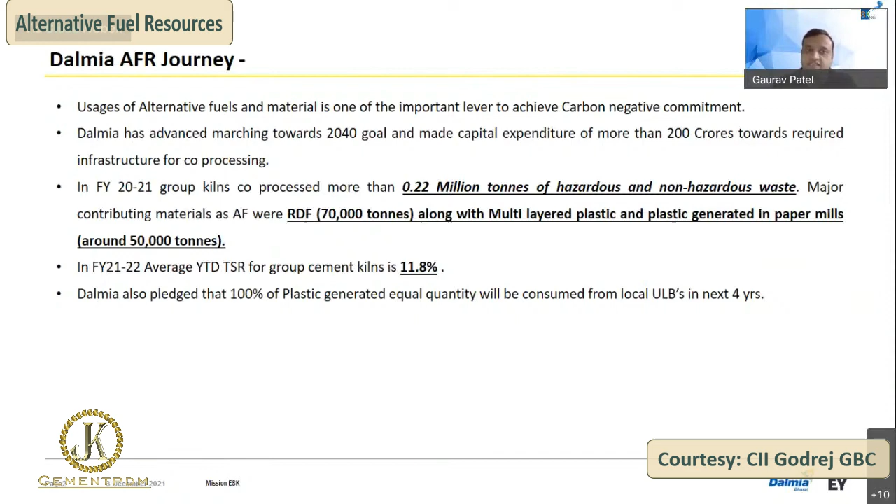Moving ahead, when our journey started in 2019, our TSR was 3.9%. Then we moved on. By end of FY20, by December 20, we had installed imported shredders. Earlier, we had only Indian shredders and feeders, which I can say was a very crude manner of utilizing the AFRs.

We increased the TSR from 3.9 and up to October it is 11.8% TSR. And by March 2022, our TSR target for our entire group would be 20% TSR. We are utilizing AFR in 11 kilns, and kiln-wise, most of the kilns are at 10% plus TSR.

Wherever there is less than 10% TSR, we are facing a challenge, as the earlier presenter also informed, that the main challenge for increasing green fuels is the chlorine content. So in two of our kilns, we have been hit by the chlorine content. Also, the product portfolio there does not allow us to increase the chloride for that particular plant. So this is the reason.

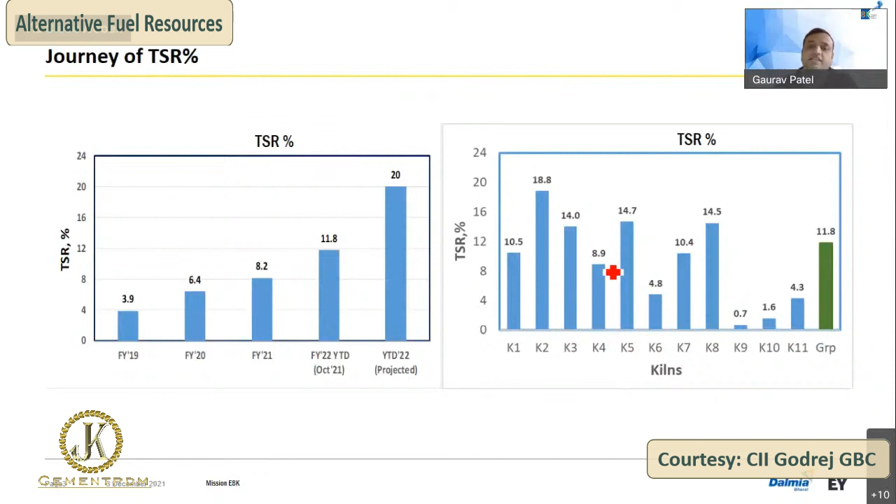So for that, we have made an investment in a chlorine bypass system, which will be commissioned by December and January 22 in two of our locations. From there, we'll be achieving 35% TSR for those two kilns and reaching our target of 20% TSR.

Among the various technologies available, for size reduction there is shredding. For separation, we also have to do metal separation, or else it will damage the refractories inside our calciners. Impregnation is always required to co-process the hazardous waste, so mixing of biomass and sludge material is important.

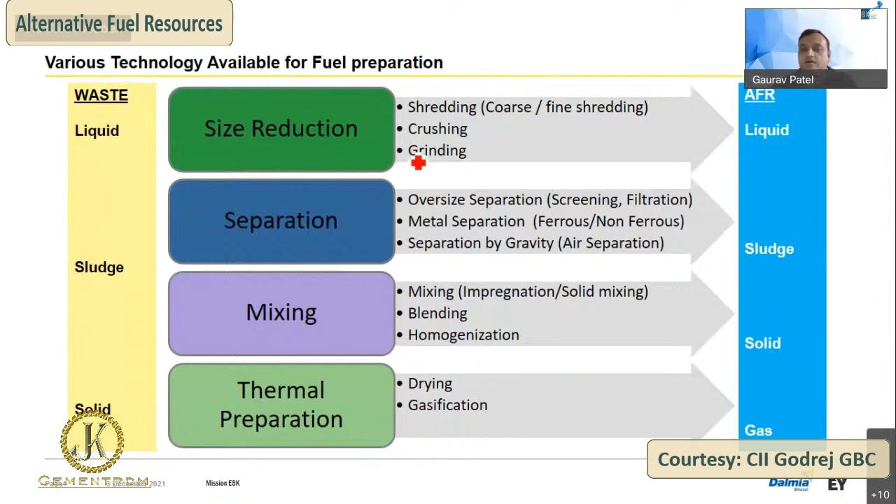And there are other methods like thermal preparation, where drying and gasification of AFRs are also done. This way we'll be getting useful quality and quantity of green fuels or AFRs for co-processing in our kilns.

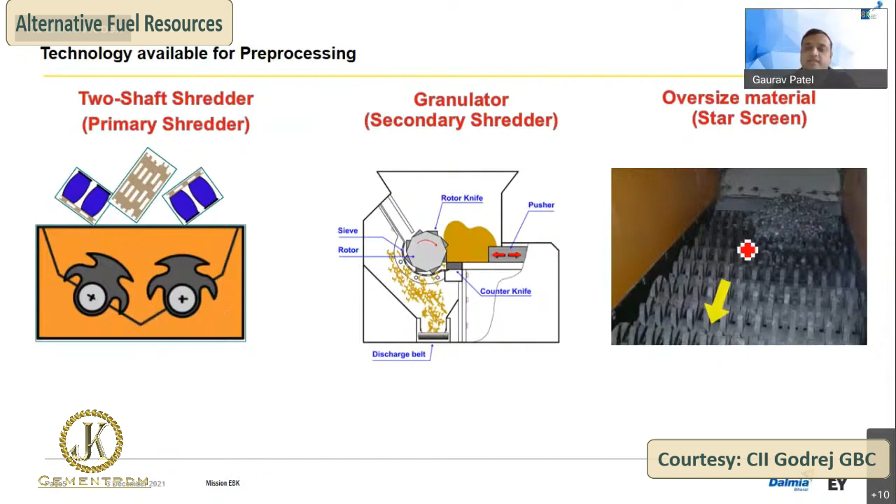We have ATS extractors installed at all our locations, and we have fluctuations of only 0.5 to 0.6 tons per hour with respect to the set point. We have installed ATS double flap systems with 5 seconds operation time. But ATS double flaps, I can say, are suitable for reaching 15 to 20% TSR.

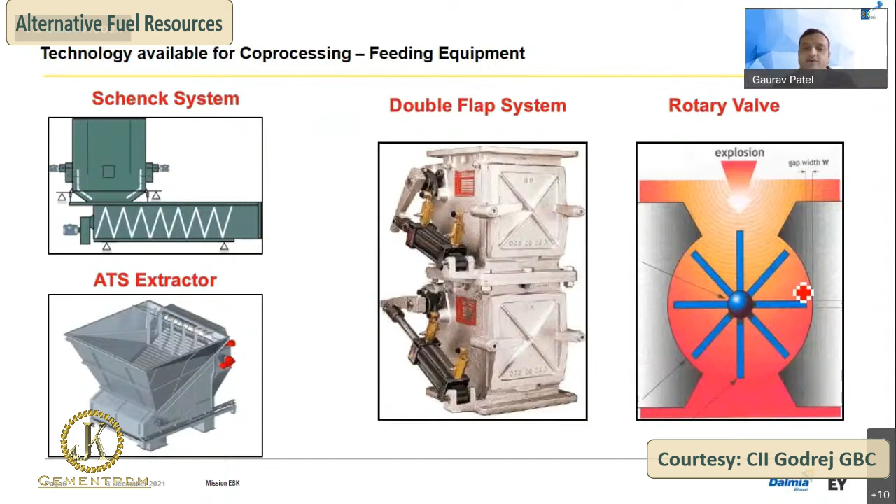Beyond that, we should go for rotary air locks to avoid batch feeding of the material going into the calciner. Once we increase the TSR, tonnages will increase, and these flaps will then work as a batch operation and feed the material in a batch process.

So this is the facility installed in DCBL, with the imported shredders, then the magnetic separator to avoid damage to refractories in the calciner at the feeding locations, then the star screen. The material is shifted to the ATS extractor, then double flaps, and fed to the calciner.

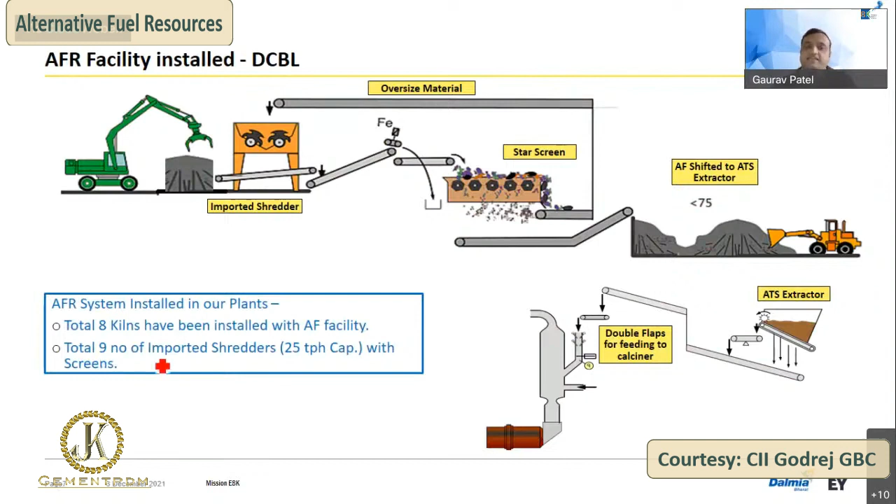So in total, 8 kilns have been installed with AF facilities, and a total of 9 imported shredders of 25 tons per hour capacity with screens have been installed in our DCBL.

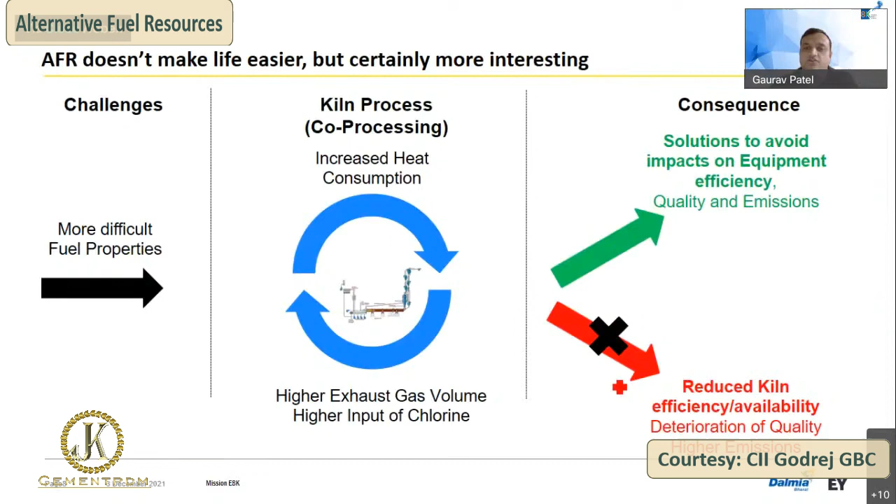Further, with this system, like we say, the increase of AFRs will increase our heat consumption and will increase chlorine, thereby increasing the pressure drop, which will reduce the clinker production. So consequences are there and we have to find the solutions to avoid the impacts. And we also have to find the solutions so that we don't reduce the kiln efficiency or availability.

So for that, our future plan is to aim to become carbon negative by 2040, with our TSR target of 20%. We are planning to install an additional shredder, mostly a secondary shredder, to reduce the size further from 75 to less than 40, so that in the available calciner residence time we can have higher green fuel feeding. Additional feeding equipment, because the ATS extractor capacity is 25 tons per hour, we need to increase it further in order to cater to the increase of heat consumption and the additional volume because of moisture.

We have to do a preheater fan upgradation, and calciner modifications are also planned. And in order to cater to chlorine management, we have been installing chloride bypass systems. So all these minimum things are required in order to achieve the group target, increase the TSR percentages, or increase the feeding of alternative fuels in our kiln.

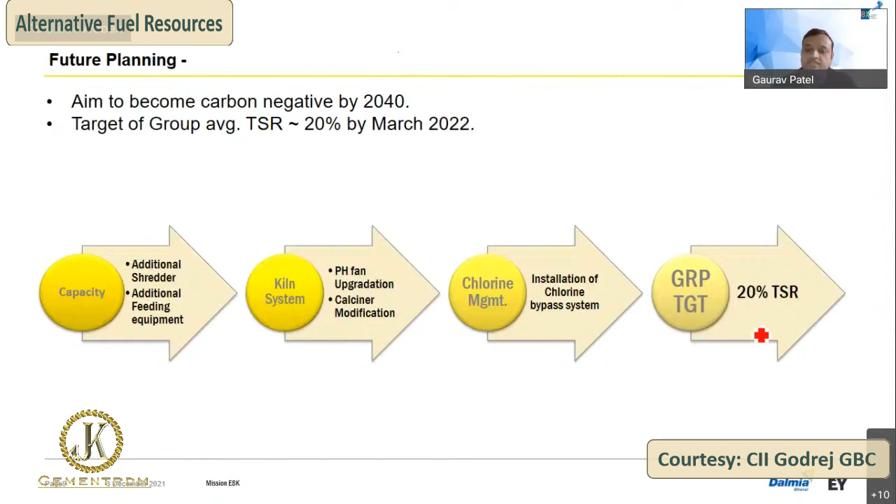Pandey sir has already informed in the starting speech that quality of heat is also important. In our business, our main business is to manufacture clinker, and side by side we also have to feed AFRs. But there should be some criteria where we accept the materials, because lower quality of heat will have a negative impact and there won't be any savings, for which we are planning to use the green fuels. So we have a waste acceptance criteria for all the materials, mostly moisture, ash, flash points. This way we have to manage our AFR business.

Challenges are high moisture and ash. So we are in talks for installation of RDF dryers for reduction of moisture, and exploring a system for separating the ash due to non-availability of good quality limestone. And once we go higher on TSR, our LSF requirement will also increase. So this is where we have to find a solution for extracting the ash. Chlorine content, there's only one solution, which is to install a chlorine management system, like a chloride bypass system.

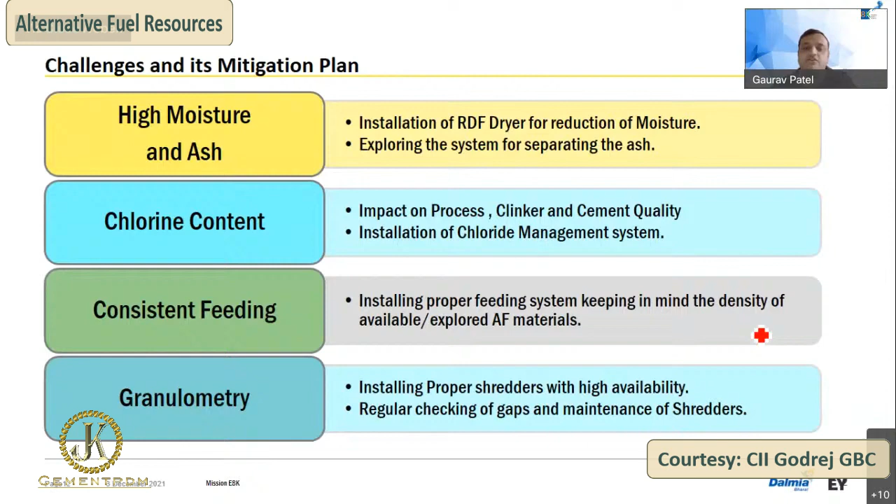Another is consistent feeding. Even if we maintain moisture and ash within our criteria, if consistent feeding is not there, that will also have a negative impact on our system. And granulometry is the size, so proper maintenance of shredders and proper gap checking are also important in order to achieve our target of higher TSR.

Next, moisture: since most RDF comes from biomine sites, there is open transportation of AF, and there is a lack of storage sheds at site and at the cement plant. The method of waste generation and supply depends from supplier to supplier. This results in flame cooling and higher specific thermal energy consumption because of higher moisture content, 40-45% also. And indirectly we have to handle more gas volume with the same preheater fan while maintaining the clinker TPD. So our mitigation plan is covered storage for AF inbound as well as outbound material; whatever shed we had also has to be covered.

Modifications we've already planned: replacement of preheater fans, drying of AF with the help of waste gases, and negotiation for maximum water content or penalties. Like if the moisture content is increasing, we have to have penalties from the supplier to pay us more in order to cater to the higher moisture content.

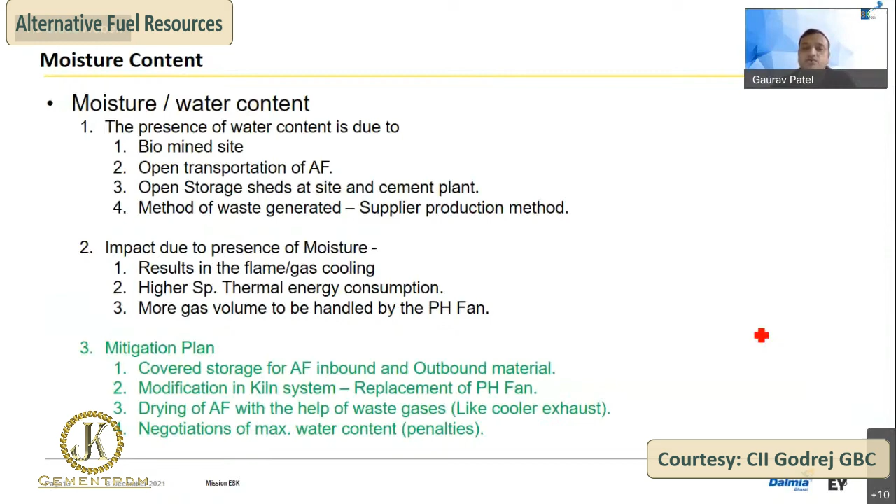Ash is also similar; the majority comes from biomine sites, and dumping and loading techniques increase the ash percentage. This will also have an impact on energy consumption. And the major impact is we have to purchase high grade limestone if that particular quality of limestone is not available with us. And the ultimate result, if we don't maintain the quality, is production of off-spec clinker, which is not our aim. So the mitigation plan is proper pre-processing at source by installing trommels, wind shifters and ballistic separators. The main thing is raw mix optimization to cater to ash and maintain good quality clinker.

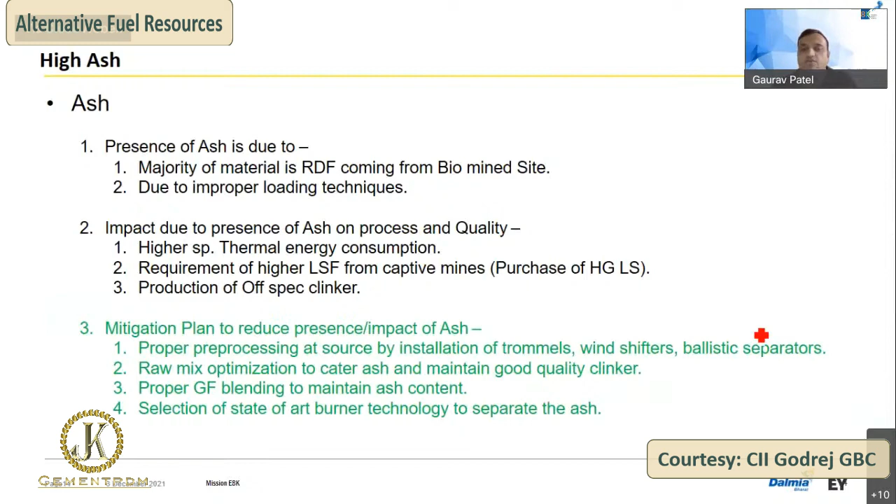Proper green fuel blending: if we have a variety of green fuel AFRs available on our side, we should mix properly to have at least 1 or 2 days of feeding heap available, so that there won't be fluctuation in ash, moisture, and CV, in order to maintain process stability. And selection of state-of-the-art burner technology to separate the ash, so that only the flame or only the heat goes into the system and ash is separated through that burner.

Chloride: yes, we are maintaining a chloride limit. The global standard is 300 grams, but we are slightly higher, around 400-500 grams chloride per ton of clinker. Chloride has the disadvantage of blocking our cyclones' bottom stage. So to avoid the chloride, there are three systems available. One is the proven technology, gas bypass, around 15 to 20 crores of investment, and we have been planning to install it in 2 of our locations.

Another is hot meal extraction, which gives an additional potential of about 200 grams increase of chloride, extracting material around 1 to 2 tons per hour from the bottom stage cyclone hot meal. So this way we can increase chlorine potential by 200 grams. Another is kiln dust extraction: in the direct mode of operation, whenever the raw mill is off, we extract the dust from the baghouse and don't mix it into the homogenization silo. This also gives around 100 grams of potential increase.

The last is chlorine concentration to be agreed with the waste generator, with a cost tag on chlorine concentration. Like moisture, we should also have it on chlorine: higher chlorine, higher the tipping fees, in order to have the ROI working for gas bypass or any chlorine management system installation. For this, every 2 hours we take a sample from the co-processing feeding belt. Once a shift we do the analysis for moisture, ash, and chloride, and we also have it online in the DCS. We incorporated the Thomas curve, as the earlier presenter said, to detect beforehand whether a blockage is going to happen.

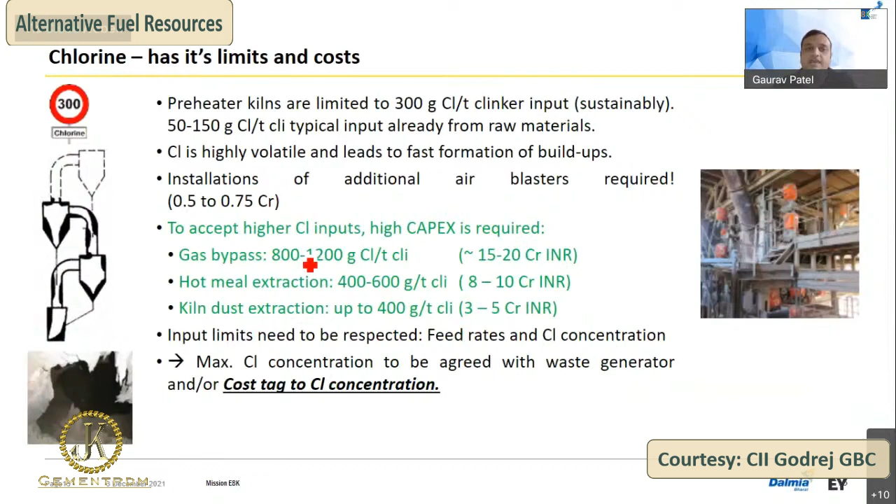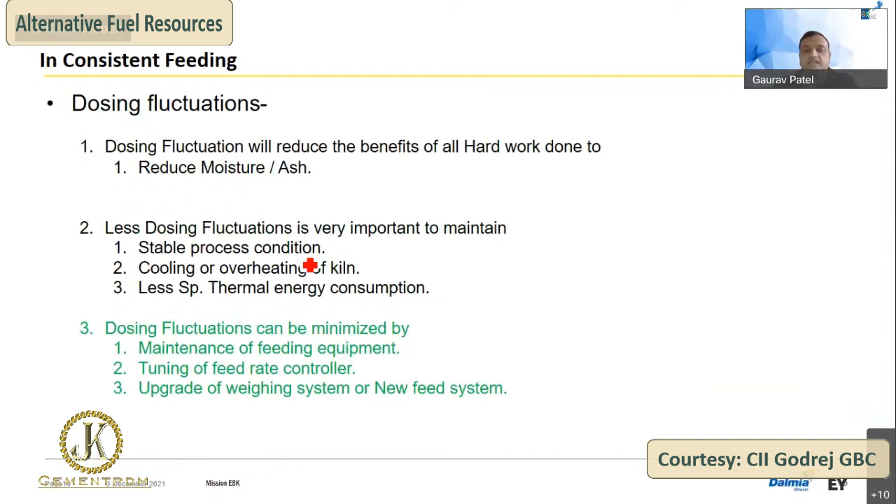These are all the process optimization methods we explained to our CROs, who are the main persons operating this green fuel business. Consistent feeding: dosing fluctuation reduces the benefits of all the hard work done to reduce moisture and ash. If dosing fluctuation is on the higher side, all this hard work is washed off. Less dosing leads to process instability and cooling of flames. Dosing fluctuation can be minimized by maintenance of feeding equipment, tuning of the feed rate controller, or upgrade of the weighing system. The ATS extractor is the latest we have. Earlier we had weigh feeders with dosing fluctuations, and now with the ATS extractor we are able to eliminate inconsistent feeding.

Granulometry: it is always better for the process engineers or production guys to say, give us smaller size material. The smaller the size, the better the combustion. But in the AFR business, reducing the size has a negative impact on the cost of that material. So we have to see a win-win for savings as well as process conditions. For the calciner, around 80 to 40 size is possible. If my calciner can handle 80 to 60 size, we should shred only to 80 to 60, not to 40, because that will eat away our savings in preparation and handling.

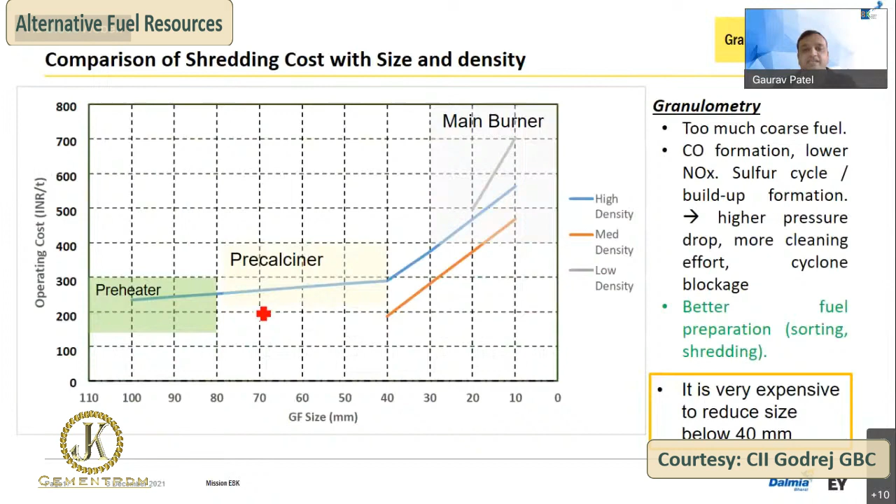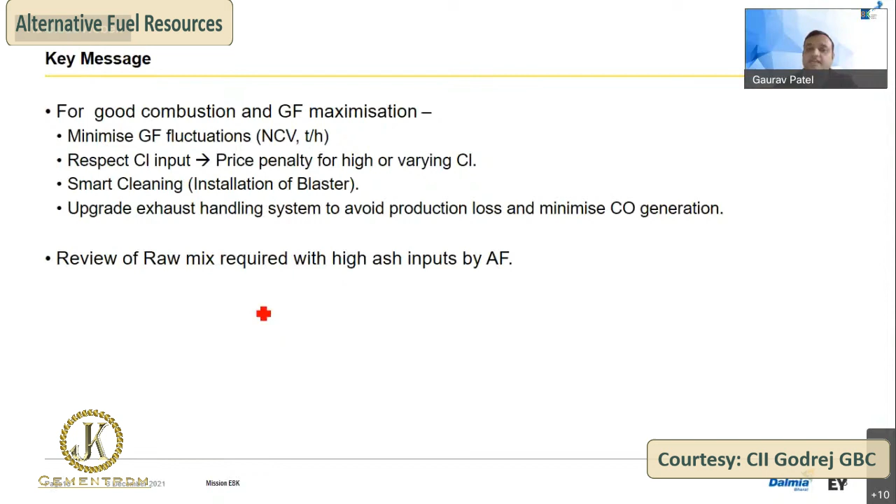So the key message is that for better combustion and green fuel maximization, minimize green fuel fluctuations, always respect chlorine input, with a price penalty for high or varying chlorine, and smart cleaning with installation of blasters. Wherever possible, instead of manual cleaning, we should install blasters for online and regular cleaning, and upgrade the exhaust handling system to avoid production loss and minimize CO generation. And review of the raw mix is required with high ash inputs by AF. This is the most important point for maximization of green fuels.